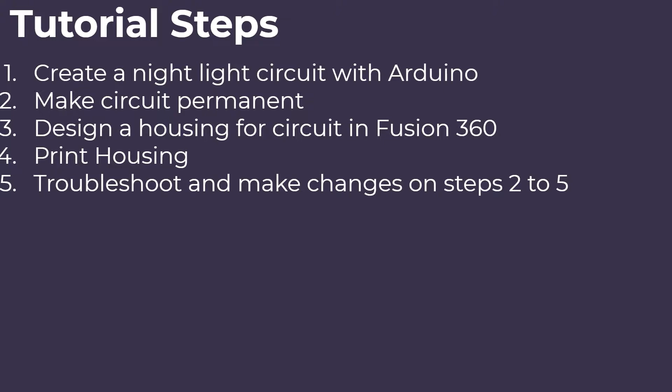And then we will take that, we'll move that into CAD with Fusion 360, and we will build a little housing for our nightlight. We'll print the housing, and at this point we will call this project done. But typically at this point what you would do is you'd repeat steps 2 to 5 until you have something that is worthwhile and ready to take out in the world and test. And also while you're testing, you'd probably repeat steps 2 to 5 as well. So those are the goals for today, and now let's jump over and get to making. Or should I say prototyping?

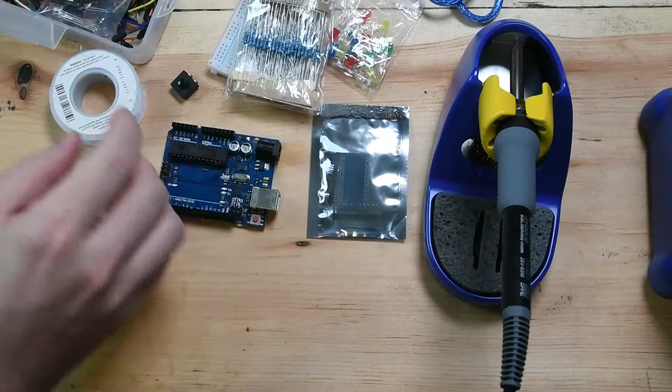For this particular project, I wanted to start with the design of the circuit. And I think every project's different, and kind of the steps in which you take to complete a project are different. But for this one, particularly, I didn't quite know the arrangement of how all the pieces would fit together in the circuit, and so I thought it was best to start with the circuit.

So I got an Arduino Pro Micro, and it happened that one of the pins was missing, so just real quick adding one of those on, and then I'm going to go through and solder those on before continuing on to building the rest of the components.

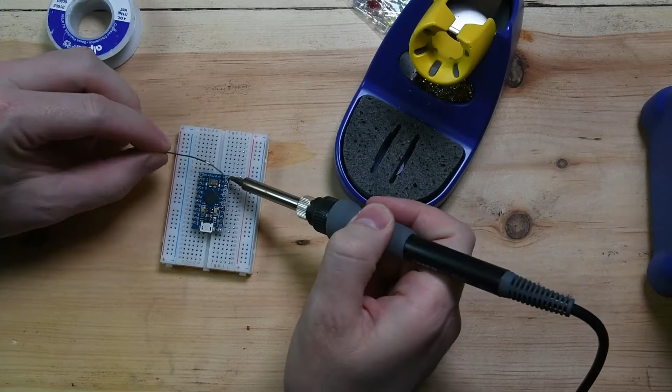Soldering is not the most important skill to have. You can get away with doing a lot of these things without soldering. You can bring prototypes to market without soldering. The breadboard that you see here, which is the white block where the circuit board plugs into, actually has a sticky adhesive back. And so if things rest nicely into the breadboard, you can actually just get away with skipping

the whole soldering process. But sometimes you'll find that you need to make changes, or you'll order parts like I did here, and it arrived and it needed to be soldered. And so soldering is a good skill to have. You can find many tutorials to do it. It's not that hard to pick up. Highly recommend learning soldering. Cool.

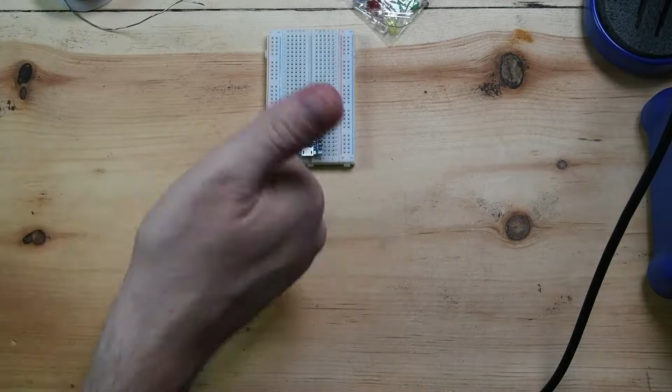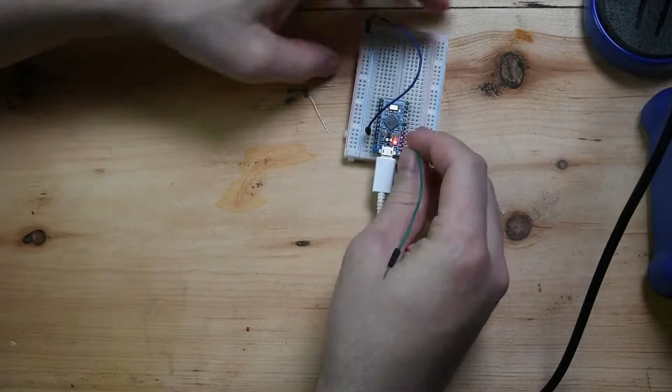So we have our Arduino plugged into the computer, and it's turned on. And so now we're going to go ahead and start wiring up our schematic. So first we're going to start out with some LEDs, and as a little aside here, I like to kind of test things as I go. So you'll see me right here testing that each of the LEDs works, and I like to know that everything works before I start putting it all together, because debugging is always kind of a nuisance.

So kind of like this, I'll try and plug in little facts as we go along the way to help you in your prototyping journey, because prototyping should be easy. You should be able to do what you want and have fun with it, and not get stuck on figuring out why your LEDs don't work. Oh, because you got a bad LED.

So usually what I like to do when I have components that I don't know how to use, I will Google them. In this case, I'm Googling a photoresistor, and that's kind of where the magic happens. A photoresistor is capable of measuring the amount of light in the room. And so I'm going through here. I found an example project, and with Arduino, you can find tons of these. And so I'm disconnecting my little circuit that I made for the LEDs, and I'm wiring up this photoresistor.

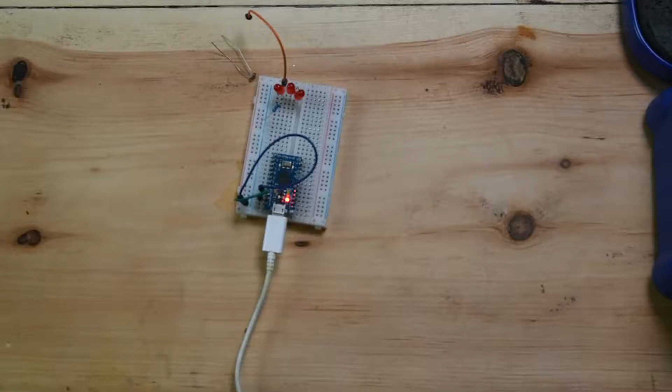So I like to test things in isolation. So I disconnected my LED circuit, and now I'm just plugging in my photoresistor, and I'm checking and making sure that it works. And I'm grabbing some sample code that I can throw into my Arduino software and upload to the Arduino and then test out.

So I like to grab examples. They're a great place to start because someone else has already proven that you can do the thing that you want to do. And I'll start with the example and then strip out the code and things that I don't need. So that's what we'll see me doing here. And then I'll throw in things. Serial.print helps me debug and troubleshoot, so I add those things in. And now I'm just cleaning up the rest of the code so I can focus on exactly what I want to do with this code.

And we are ready to test. So go ahead and configure our settings in Arduino, and we are uploading. So back over to the board, we can try out when we cover the sensor, and then we can see our values get read out there. And that's kind of the foundation where now we have these LEDs that work, and we have this photoresistor that works. And now we need to write some code that connects the two.

So again, kind of in isolation, I'll comment out the code for one part of it. I'll write the code for the other part of it, make sure that works, and then slowly start to combine the two things together until both of them work. So here I am writing just a simple proof of concept to make the LEDs work. Just a simple blink, make the LEDs turn on, and then make the LEDs turn off.

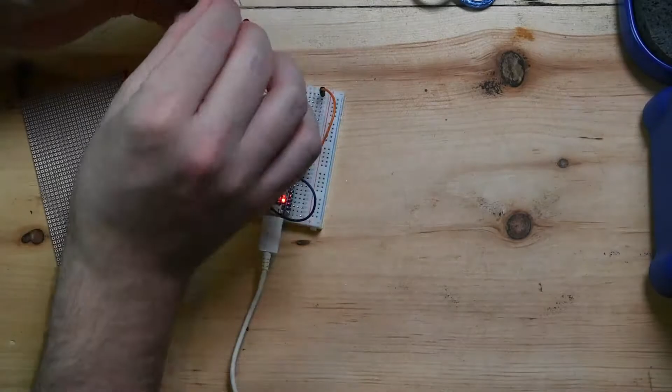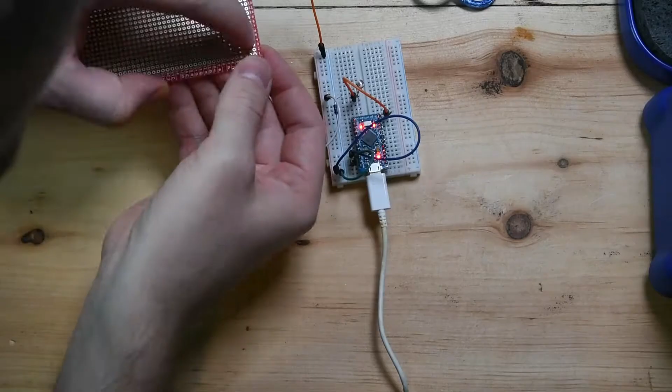So now we have everything wired up together and we're checking it out and it looks like it works. And so we will call the breadboarding process done. So next up is the process of moving things to a more permanent home on a circuit board. And personally, I do not enjoy this process. For quick prototypes, it makes sense. If you want to get something assembled and ready to go within hours, this is the way to do it.

I would much rather prefer to build a printed circuit board in EagleCAD or KiCad or a similar software, send it off to be manufactured, and then solder the components on to the board that you get back. This process of wiring everything together, of laying out the components, and all this is just full of error.

My first adventure into making one of these, if I was experienced, probably would have taken me an hour. I think in total it might have taken me 12 hours to assemble. There's a lot going on here, but if you've got the experience, this is the way to go. And if you don't have the time, this is the way to go.

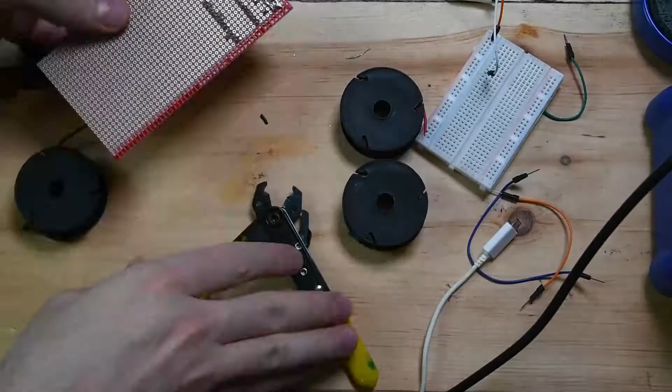So basically what I'm doing is I'm taking component by component and I'm laying them out onto this circuit board that I have here, which I ordered off of SparkFun, and it's kind of like a breakaway circuit board, so you only use as much circuit board as you need. So at the end, you'll actually see me snap the edges off, and I'll have a nice little square leftover that has only the circuit board that I need.

And so I'm basically moving all of my components one at a time over to this board. And it's a long, fun, smelly process. You're breathing in fumes and all that good stuff, and you're probably going to mess things up. Luckily, I managed to get this all together on the first go. And so solder all the components on, and then you'll need to wire them all up and all that.

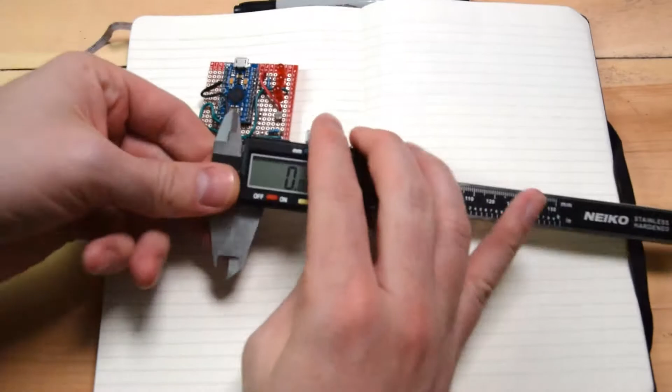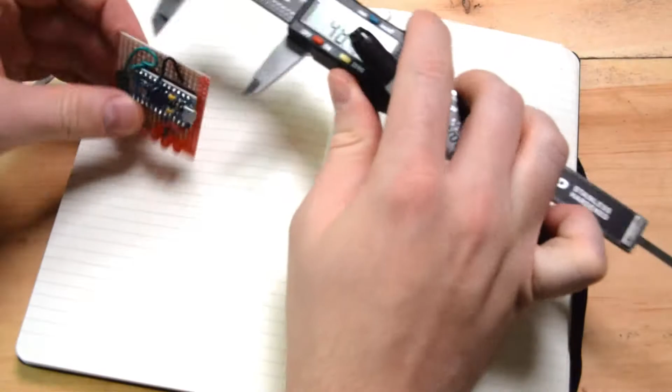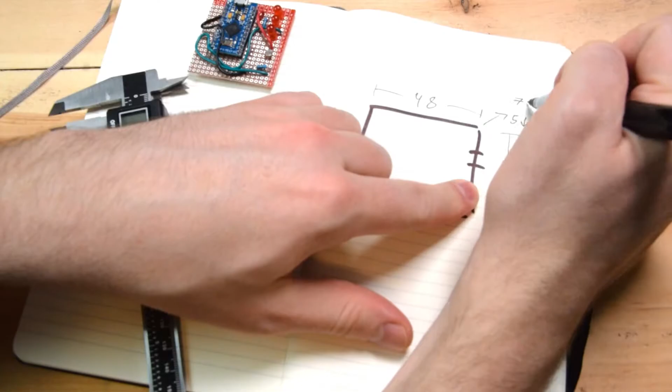At this point, I like to start taking the circuit that I've designed and taking measurements of it. So I do this generally with pen, paper, and a set of calipers. Calipers are a great tool for getting very precise measurements. So here I'm getting measurements up to the 100th of a millimeter. I generally only go to full millimeters or half millimeters, depending on the project that I'm working on. And so I'm taking dimensions, widths, heights, depths, distances between components, and things like that.

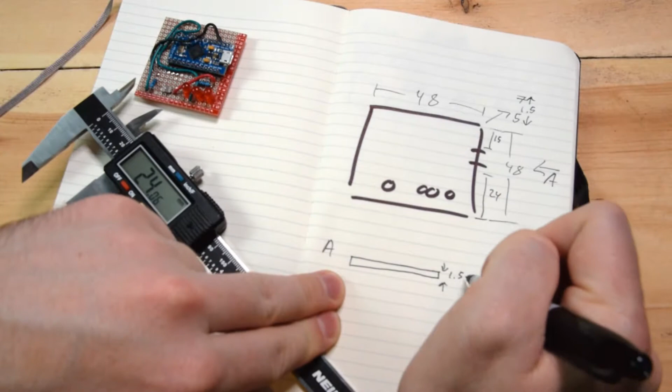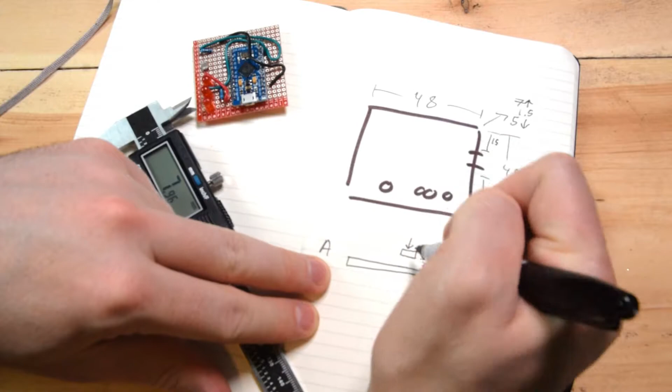And so what I will do is I will take what I've built here and I will put this into my 3D CAD software. And we'll see that in the next step. And this is always a great way to visualize your model and how it will fit into a case before you actually build the case. So the first step of doing such a thing is always actually just to model the thing that you've built. And then from there, you'll use that as a starting point to build the case or the housing that you'll want to use for your circuit or your design.

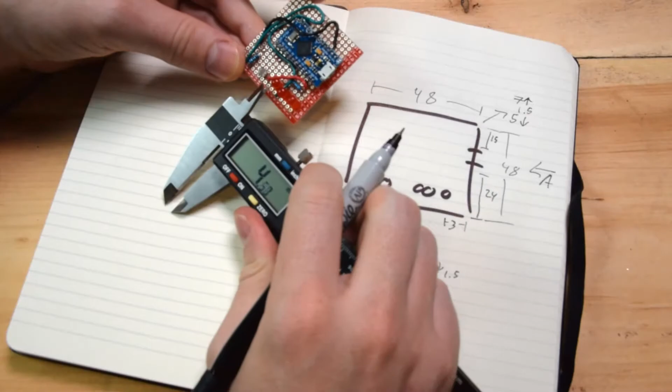And I don't always try to get all of the notes down or all of the dimensions down, but I like to get most of them down so that I'm not constantly picking up my calipers, measuring, and writing things down.

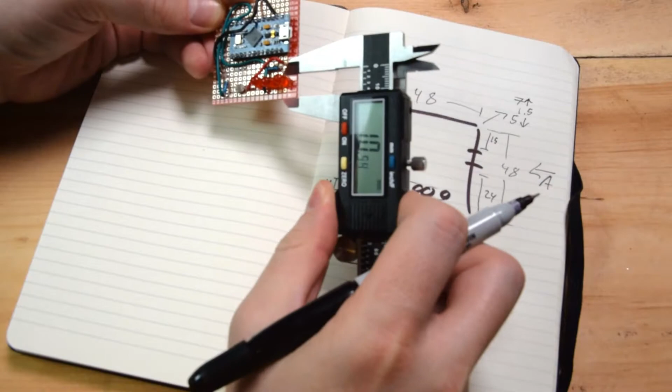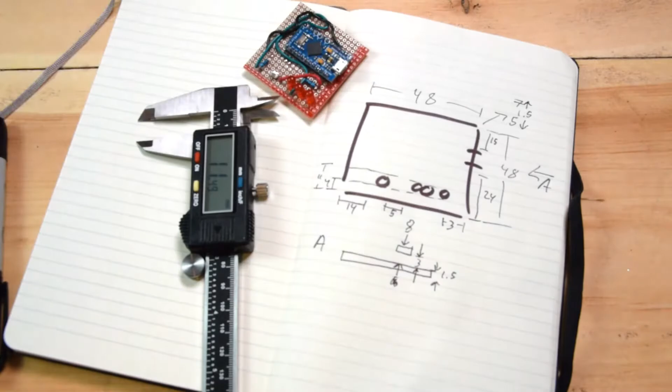So I like to do this step all in one. All right, so quick timeout here. I accidentally managed to lose the footage for me converting this drawing you see here into SolidWorks, which you now see here. So hopefully next time I will do this properly, and I apologize for that.

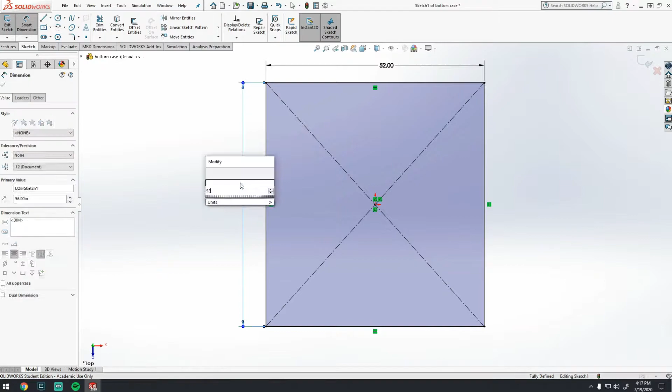So now that I have my circuit board modeled, I will start to model the housing for it. And so I've decided for this, I'm going to do a quick top half and a lower half, and together it'll kind of create a sandwich around the circuit board, and that'll be enough to kind of prove what I would like to do with this prototype.

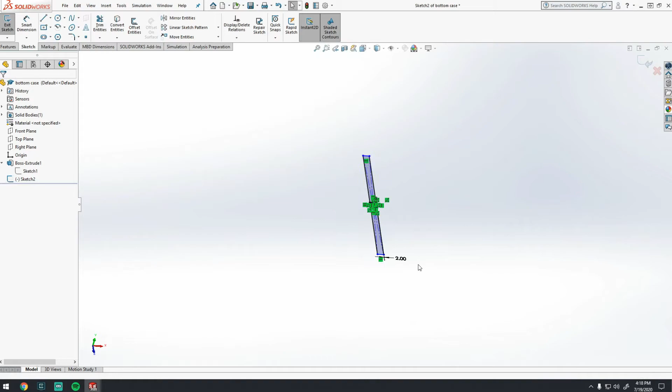And so here you see me grabbing a lot of numbers in and kind of crunching some numbers. And basically what I'm doing is I'm grabbing numbers that I've written down on paper. So for example, if the circuit was a width of X and a height of Y, I would then add a case around that was X and Y plus 2. So just add a little bit of spacing around the case. And so I use those numbers for reference.

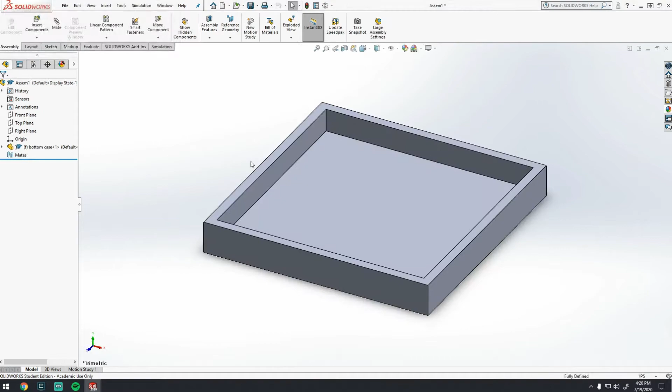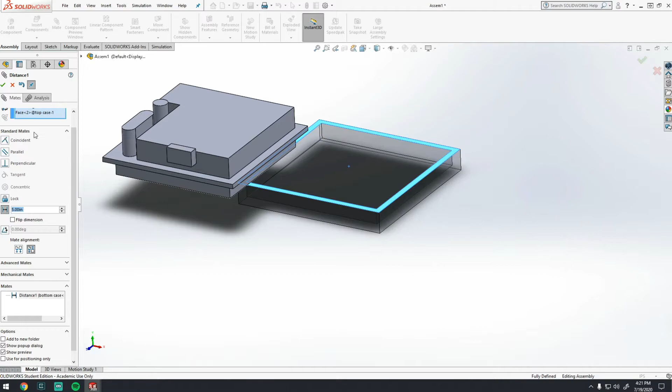And design initial, just kind of crude parts, and then I bring them into an assembly. And an assembly is a place where you can look at each of the parts and kind of put them together. So I'm now starting to make all the parts relative to each other so I can see how they'll eventually come together. So fiddling around, I'm struggling with SolidWorks, but eventually I figure out what I want to do. And so now I have a rough, very, very rough idea of what I want to build.

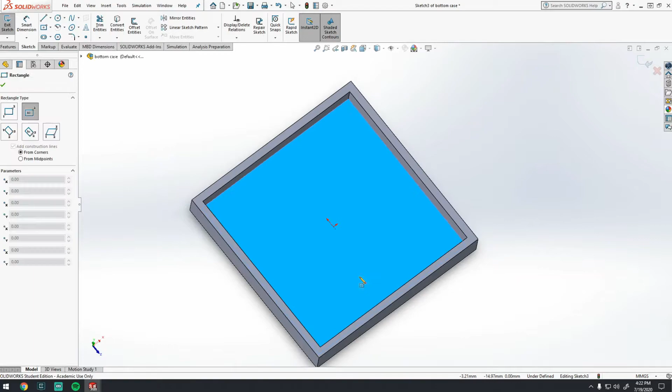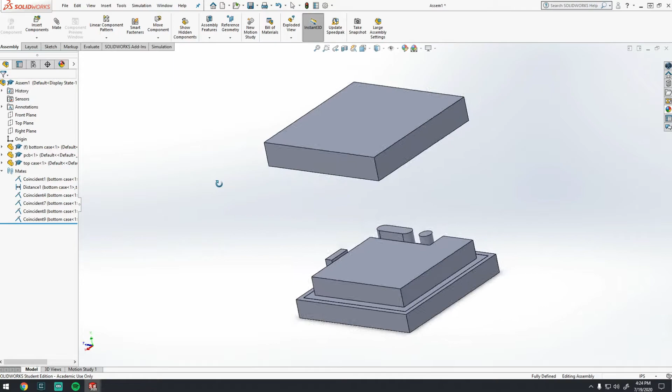And so now that I kind of got things into place, I can start to improve the top and lower half, which at this point are really just very basic looking shapes as you see here. And so what I want to do is I want to start adding first in the bottom half a little shelf on which the circuit board will sit. Sometimes when you get circuit boards manufactured, you can get little holes drilled into them that you can put screws into, but in this case we didn't have that, so I had to think a little bit creatively, and I decided to add a little shelf. And so you can see me resting the circuit board onto that shelf, and so now the bottom half is about where I want it to be.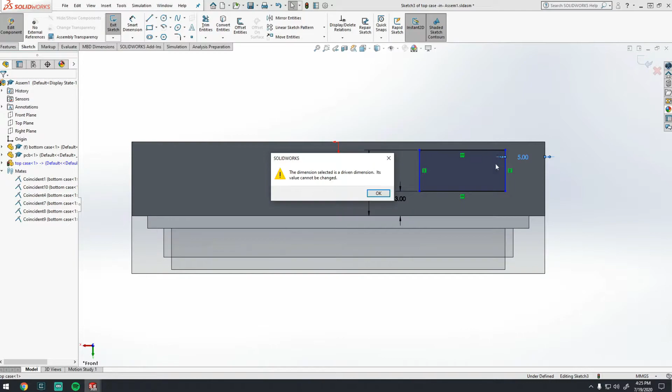And so now the top half is going to need some work of its own, and so I need to make space for the photoresistor, for the LEDs, for the USB connector to supply power to this whole circuit. And so that's about what I do next. Got some dimensions wrong, so I fiddled for a bit longer than expected, and then got a little bit confused about how I was dimensioning things. So that's my little kind of panic that's going on here. And so we'll let this play out real quickly.

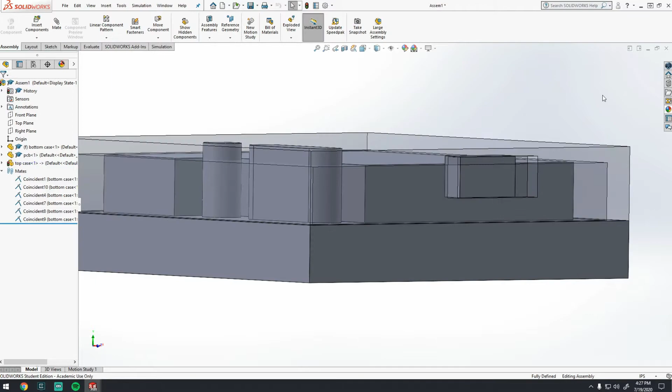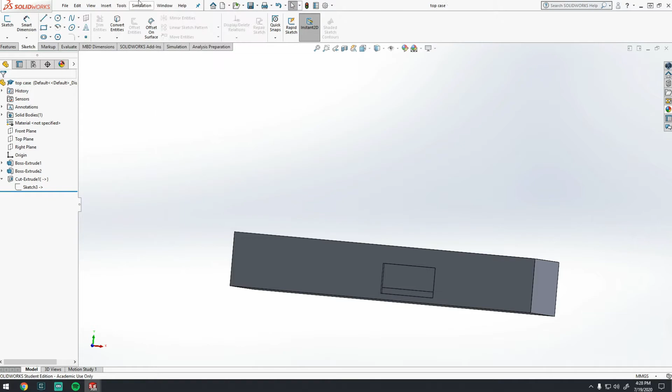This is me, again, getting confused because I did things backwards. And this is why it's just kind of great to have this model of your actual circuit so that you can reference it and see like, oh, did this actually make sense? And go, oh, no, it didn't. All right, back to the drawing board. I'd actually done the dimensions on the wrong sides, and so I flipped them around, and then things turned out well. And at this point, you can see that now I have a little slot where I can plug a USB connector in.

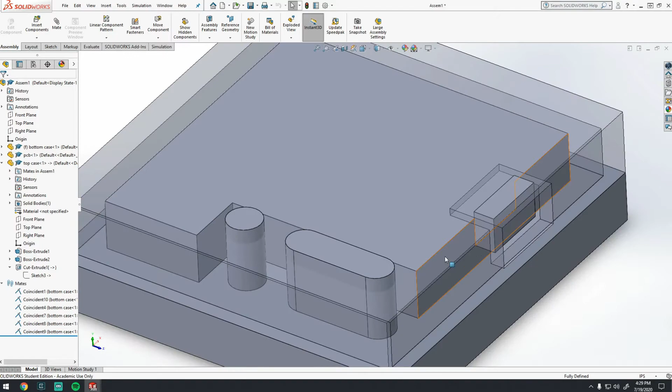And next up, I want to make some space for the LEDs and the photoresistor. And I had originally thought that I wanted to make some space between the photoresistor and the LEDs because if you think about it, if a night light turns itself off because of the light that it produces, then it's not a good night light. And so I ended up not needing to handle that, but it is a consideration that I might make in the future.

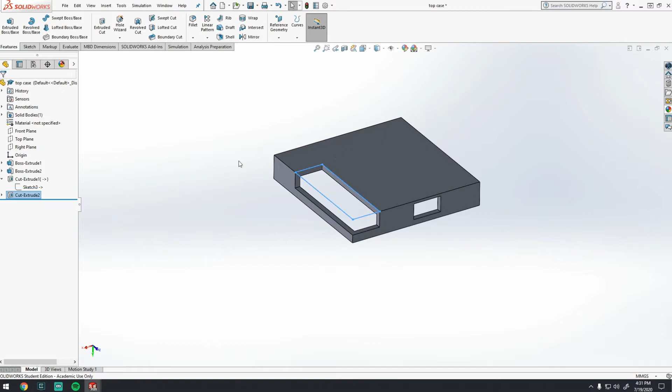For now, I went the kind of lazy route and just cut a giant hole in the top half to make room for the LEDs and the photoresistor, which you can see me doing here. I take this little pause and I like this design, but then I go back because I'm thinking about actually I'm manufacturing for 3D printing, and that little overhang that you see there doesn't work well for 3D printing.

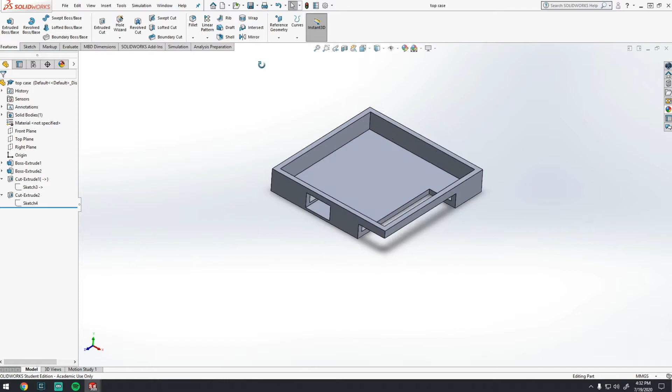And so I decided to just go ahead and take that kind of L that sticks out there, and then I deleted it because it won't print well. So now at this point, I have an upper and a lower half. They're not actually going to stick together permanently, but I said I didn't really care. I'm just going to tape them together because it's a prototype. It's quick, it's fast, it's dirty. That's the point of this. Let's prototype.

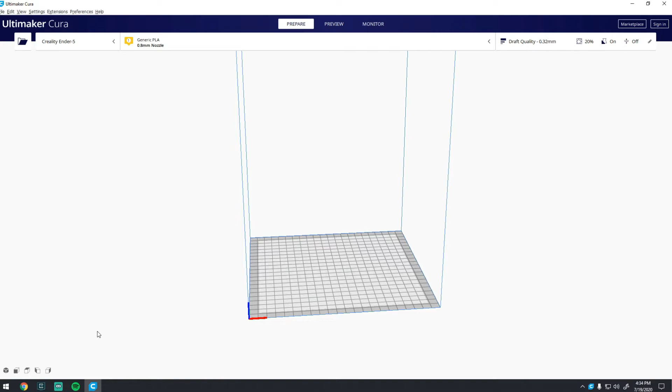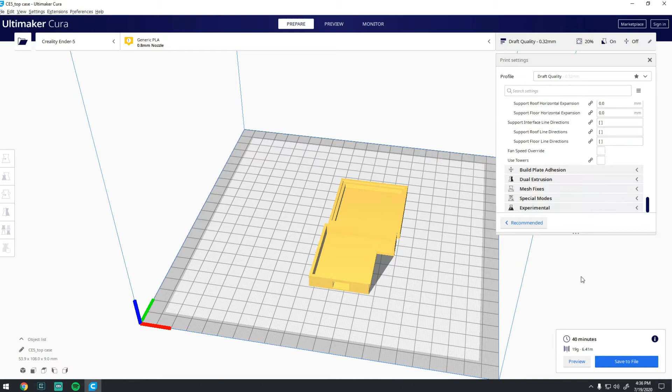So at this point, we are done with SolidWorks, and we're bringing it over to Cura, where we are getting it ready to 3D print. So we are throwing it down onto this simulated print bed that we see here, checking our settings, and this is a whole other art of learning how to do these settings. So you can go off and find videos related to your printers there, and then bring it over to OctoPi, which is software I use to control the 3D printer, and then we are good to go. We're heating up our 3D printer, and we start printing.

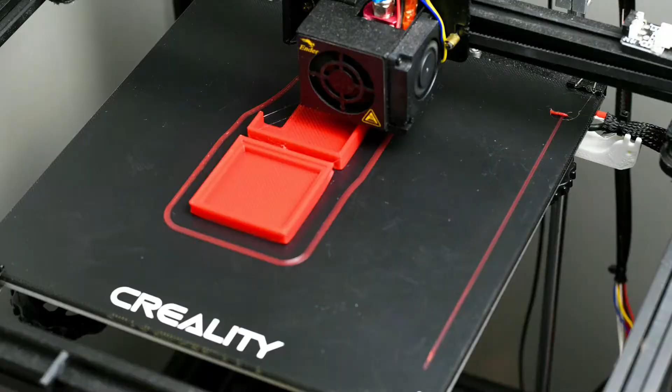So here's a lovely little time lapse of our 3D printer in action, going layer by layer. And so the great thing about 3D printing is that you can go from a CAD model to a 3D printed model that you can play around with on your desk in just a matter of hours, minutes, and not weeks, which is what I'm used to back years ago when I used to do this kind of stuff. You'd have to wait weeks to get the turnaround on these kind of things.

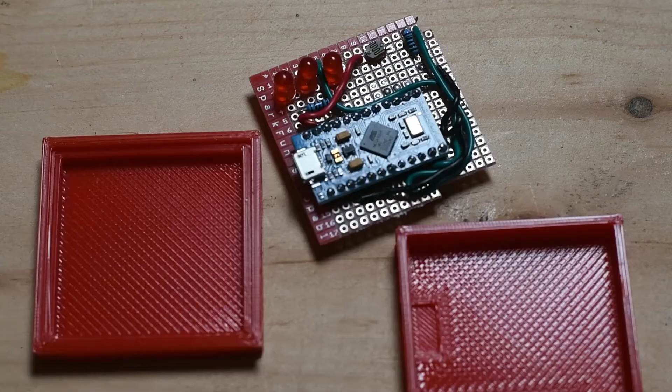So at this point, we have our top and lower half printed out, and we can start to look at things together. Doesn't come together perfectly, and so we end up using a little bit of tape to put it all together. But that's okay because we really just want to see if it functions, if it works, if we can get some input from people. We can make it pretty in the future. Right now, we want to make it work. Even right there, you'll notice that, oh, the connector doesn't actually work that well, and whoops.

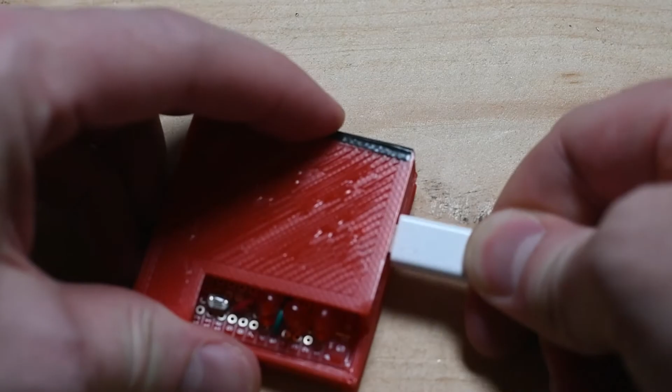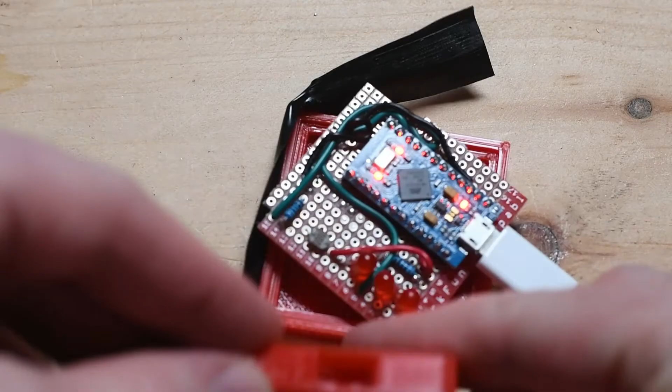So we could reprint, we could remodel, or we could just disassemble and break off pieces of plastic until it works, which is what I ended up doing here because I didn't want to wait for it to print again. So I'm just breaking off a piece on the top, putting it back together. Now we're good, taping it back together. And now we have a basic nightlight. And we are done.

So at this point, that's it. We've gone through taking an idea, putting it onto a breadboard, writing some code for it, moving that code and that idea to a more permanent circuit board, and then 3D modeling and 3D printing a housing that goes around that circuit board. And at that point, we can take what we've built, we can take it out into the world, we can test it out. I could probably just plug it in my bedroom and see how it functions as a nightlight.

And at that point, you can kind of repeat those steps. You can refine the process. You can write better code. You can improve your CAD model. You can improve your 3D printing process. You might want to reach out to external companies to have them do your manufacturing. And so that's where we can take it from here.